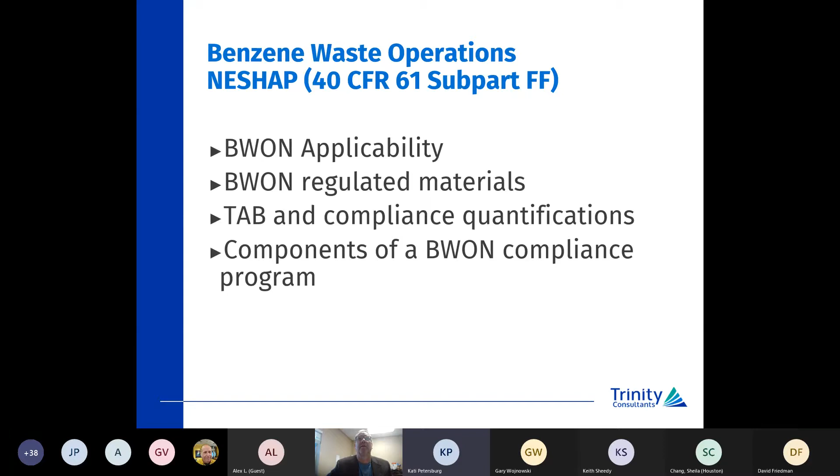All right, so let's get started with the BWON, or the Benzene Waste Operations NESHAP, which, as we now know, ethylene plants are required to comply with. So the BWON requirements are codified in 40 CFR Part 61 Subpart FF. The main topics that we are going to be addressing today are who is subject to the BWON, what materials are regulated by the BWON, what is entailed in the TAB and compliance quantifications, and what are the components of a BWON compliance program.

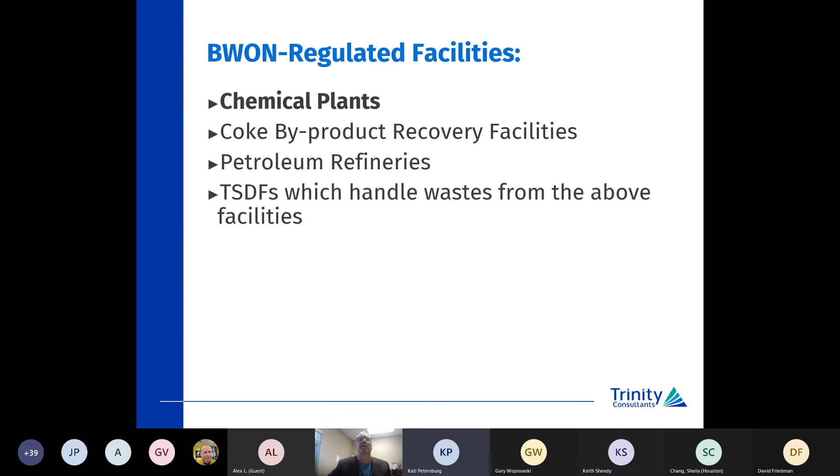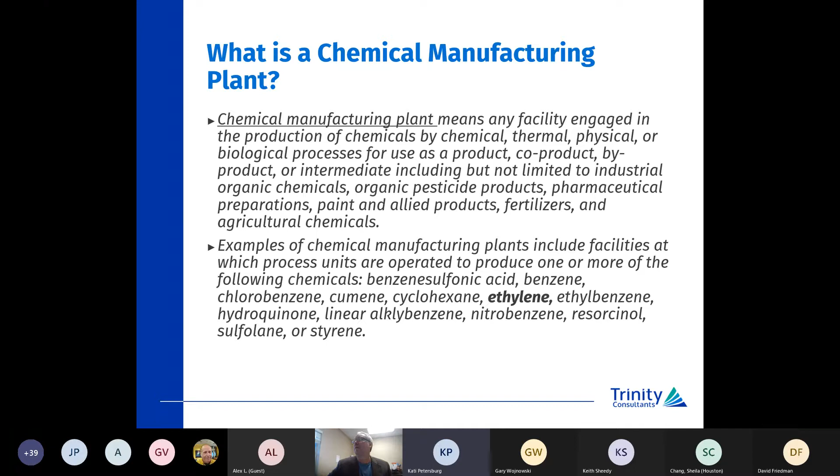So the applicability conditions of the BWON, which are found at 61.340, state that the BWON applies to owners and operators of chemical manufacturing plants, coke byproduct recovery plants, petroleum refineries, and TSDFs that manage waste from those facilities. Now, the majority of you are likely attending this webinar because you're associated with a chemical plant. So what is considered a chemical plant in the BWON? Bear in mind that there are various definitions among the environmental regulations. So I've included the definition of a chemical manufacturing plant from the BWON on this slide. I'm not going to read this, but I do want to point out that the BWON specifically identifies ethylene manufacturing facilities in the rule.

However, there are other considerations to make if you are a chemical manufacturing plant. So if you are a facility who is identified as a chemical process plant, which is one of the 28 source categories named in the NSR definition of a major stationary source, then you are likely subject to the BWON. If you are a facility that is subject to one of the many MACT standards that contain overlap provisions with the BWON, including the EMACT, then you are subject to the BWON.

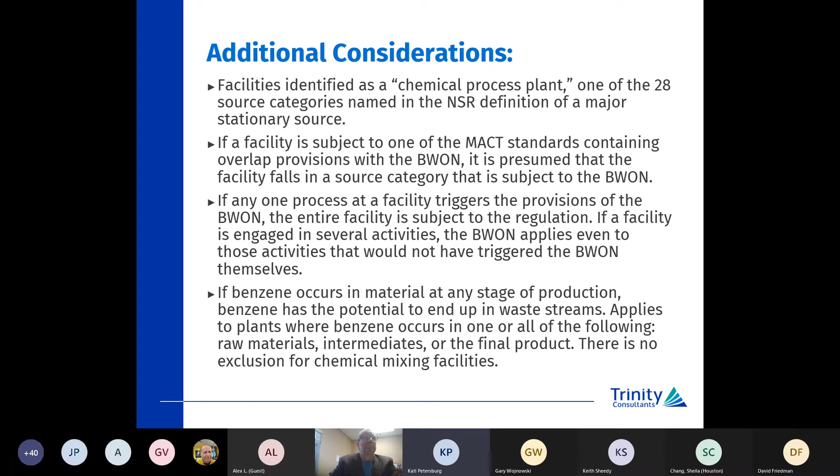If any one process at your facility triggers the provisions of the BWON, then your entire facility is subject to the BWON. So if you have multiple activities at your facility, the BWON applies to all of those activities, not only those that triggered the BWON. And if benzene occurs at any stage of production at your facility, whether this is raw materials, processing, mixing, final product, and there is the potential for benzene to end up in your waste streams, you are subject to the BWON.

Another thing I'd like to point out is that while the BWON is found in the air regulations, it is more easily understood as a wastewater regulation. At no point in the BWON compliance would you determine what your actual emissions are. Rather, you focus on the potential of the amount of benzene that could theoretically volatilize.

Now, the BWON's fundamental stipulation is for benzene-containing waste to be managed in controlled systems until that waste is either treated to remove the benzene or returned to the process. And if vapors are generated from control equipment, those vapors must also be managed in controlled systems until treated or directed to a fuel gas system.

So air quality regulations typically require affected sites to quantify their potential pollutant emissions in order to establish which sites are major and which are not. And then only the major emission sources are required to implement control provisions. In the case of the BWON, only those sites with large amounts of benzene-containing wastes must control and treat their wastes and associated vapors.

Now, the trigger for the control provisions is found in the waste characterization called the TAB, or total annual benzene. And that's the sum of the benzene loading in aqueous BWON-regulated waste materials at their point of generation, or point of waste generation, or POG. Now, aqueous in the BWON means that a material is greater than 10% water at either its point of generation or at any time during its management as a BWON waste.

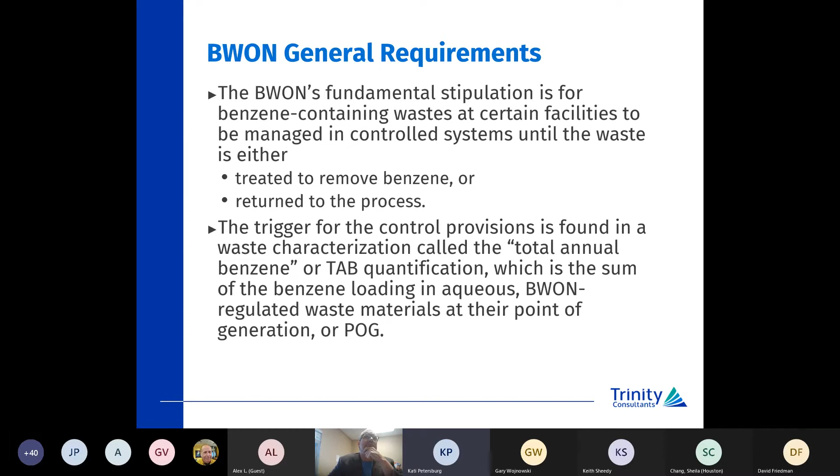So what are BWON regulated materials? Well, the definition of waste in the BWON is a bit more far-reaching than what you find in other regulations like RCRA or the HON. I've highlighted the significant parts of the definition here, and I'll go ahead and read that. So waste is any material that is discarded or is being accumulated, stored, or treated prior to being discarded, recycled, or discharged. So what that means is that waste materials under the BWON, even if they're recycled or sent back to the process, are still subject to this rule.

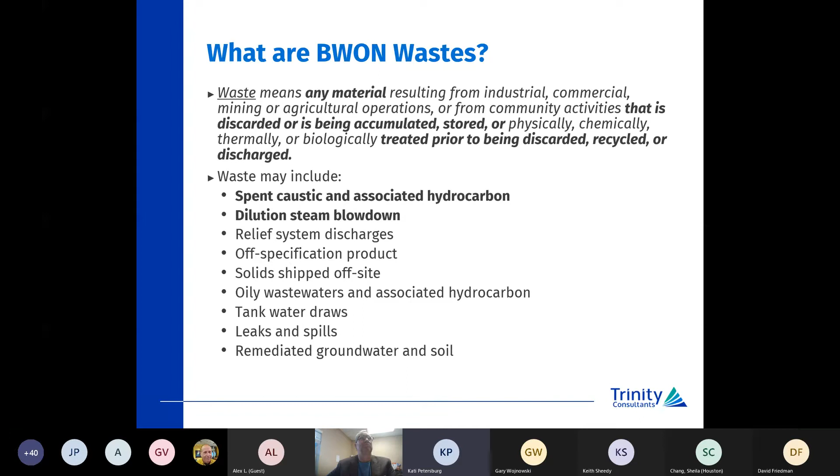On this slide, there are a number of examples of waste materials. In bold are the two that are specifically identified in the EMACT: spent caustic, and that would include the associated hydrocarbon, which we're going to talk about a little bit on the next slide, and dilution steam blowdown.

Okay, so a point of waste generation or point of generation in the BWON. The definition of this varies from a point of determination, or POD, as defined in other MACT wastewater regulations. In the BWON, the point of generation is often upstream of where you would identify the POD, let's say under the HON.

Now, this is kind of a significant theme with the BWON. Both phases of every point of generation must be accounted for in the TAB quantification. This is important when you consider that if the organic phase of a stream is just 1% of the total throughput or flow, but the concentration is 100 times what you find in the water phase, that's going to double the benzene loading in that particular waste stream.

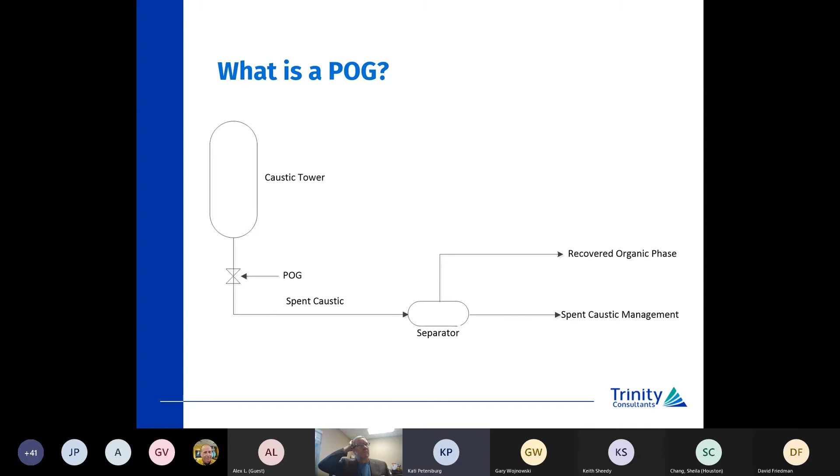So we've talked about the TAB quantification, which is the trigger for the control provisions in the BWON. And the TAB is the sum, like I said before, of the benzene loading in aqueous BWON wastes, both the uncontrolled and the controlled. We will talk briefly a little bit later about how to determine your TAB quantification. But the thing right now to know is that if your TAB is greater than 10 megagrams per year benzene, then your site is subject to the control provisions.

If the TAB quantification is less than 10 megagrams per year, then your site does not need to implement the control provisions under just the BWON, though the TAB quantification must be redetermined each year. And then with a TAB less than 1, you submit only the initial TAB.

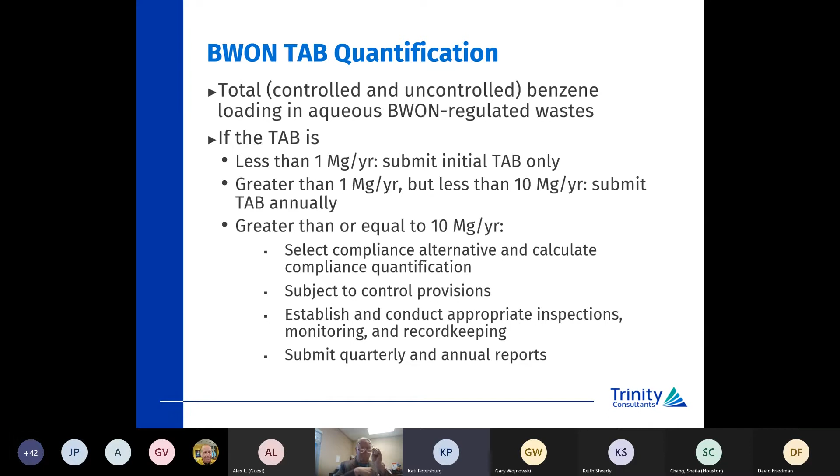So for facilities that trigger the control provisions, because their TAB's greater than 10 megs, the BWON recognizes, because of reality, practical situations, that not all benzene containing waste can be controlled. So the regulation allows for certain benzene containing waste to be managed in uncontrolled systems. And there are 3 compliance alternatives that are spelled out in the BWON, and they allow for different amounts and types of waste to be controlled.

So the 6BQ, I'll talk about what each of those are. The 6BQ compliance option, where BQ stands for benzene quantity. This is EPA's preferred method or alternative. The 6BQ places a total allowable benzene threshold ceiling of 6 megagrams per year on all your uncontrolled aqueous wastes, regardless of their benzene concentration. So this alternative allows the site to choose which streams to control, which to leave uncontrolled, and how much they're going to treat the ones they've controlled.

Under the 2 meg, this is sometimes referred to as the segregate and treat option. Facilities need to control and treat the waste streams whose concentration at the point of generation is greater than 10 ppm, except for any number of streams that the facility selects whose benzene concentration is greater than 10, but their benzene loading contributes to a 2 meg per year ceiling or threshold. So the streams that are controlled must be treated so that their effluent concentration is less than 10.

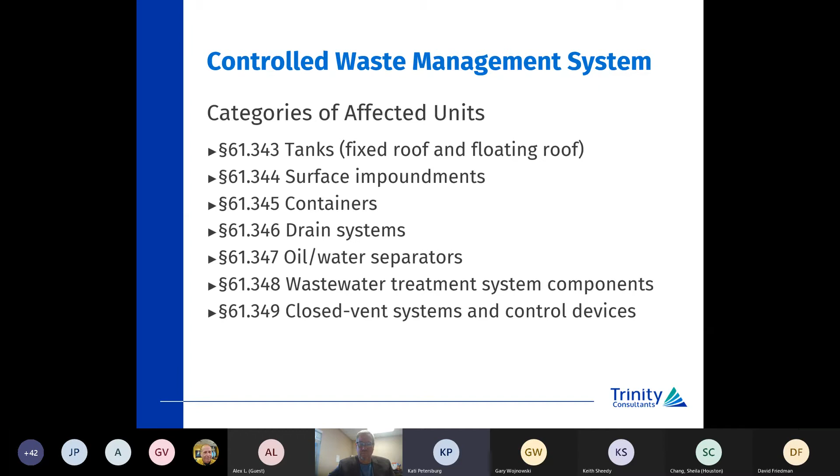Let's see, confirming sealed status typically involves monitoring for leaks initially and annually. That's Method 21. And then visually inspecting for leaks initially and quarterly. There are some caveats here with alternate standards for tanks, but we're not going to get into those. For control devices, combustion-related control devices, you need to continuously monitor an operating parameter, while carbon-related control devices, you periodically monitor the effluent vapor.

Okay, so BWON reporting requirements. For facilities with a TAB greater than 10, under the BWON, by the date of initial startup, every facility has to submit an initial certification. This initial certification says that the equipment necessary to comply with the BWON has been installed and that the required initial inspections and tests have been carried out.

An annual report, which is typically submitted on April 7th for the previous calendar year, that's also required by the BWON. In addition to the TAB quantification that we talked about, for facilities whose TAB is greater than 10, there's also a compliance demonstration in which you quantify the benzene loading in only your uncontrolled waste, and you put that towards an allowable ceiling. So that's either going to be the 6 or the 2 or the 1.

For both the TAB and the compliance quantification, there is a general requirement for a table where you list all the waste streams or the points of generation, say whether it's aqueous or non-aqueous, and whether or not it's controlled. In this table, you also include point of generation characterization data, like your annual waste quantity and range and annual flow weighted concentration data, so that you can get an annual benzene quantity for each waste stream. And then you sum each waste's benzene quantity. So to obtain a facility-wide TAB quantification, you would sum all of the uncontrolled and controlled waste to get the TAB. And then for the compliance quantification, you would sum just your uncontrolled wastes.

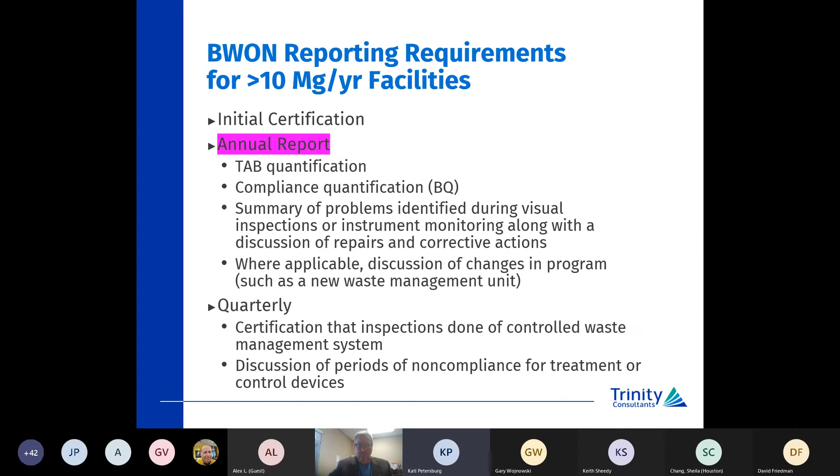However, issues that are related to treatment devices and control devices, those are included in the quarterly report. And again, you would include a description of the problem and what the corrective actions were. Okay, that kind of sums up the BWON requirements. So let's move on to the EMACT.

The EMACT, or ethylene MACT, which is intended to control organic HAPs from ethylene plants or propylene plants. This was promulgated in 2000 along with several other MACT rules as part of the generic MACT or subpart YY. Along with YY, subpart XX was simultaneously promulgated, and this is where you will find the requirements for ethylene process wastes and heat exchange systems. We're going to be focusing on process wastes.

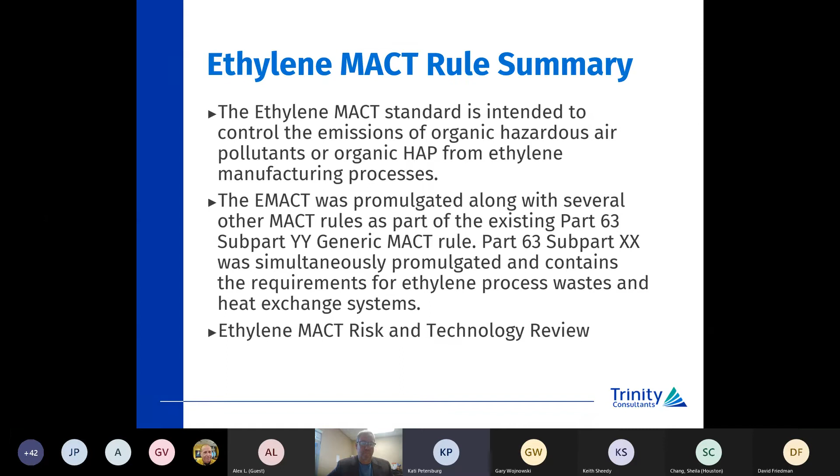Okay, so the ethylene MACT RTR, or the Risk and Technology Review, the final rule for that was proposed in October of 2019, and then published on July 6th of last year. So you'll see the compliance date for that is either initial startup of a facility or 3 years after publication of the RTR, which would mean that those changes go into effect in July of 2023.

The RTR includes updates to the EMACT standard, although today I'm only going to be discussing the changes to the EMACT that apply to the BWON overlap. So as I mentioned before, the EMACT is intended to control the emissions of organic HAPs from ethylene and propylene plants. Now, one thing to note is that these facilities, any process and equipment that are subject to either MACT CC or the HON, they're exempt from the EMACT, except as provided for in the wastewater overlap provisions.

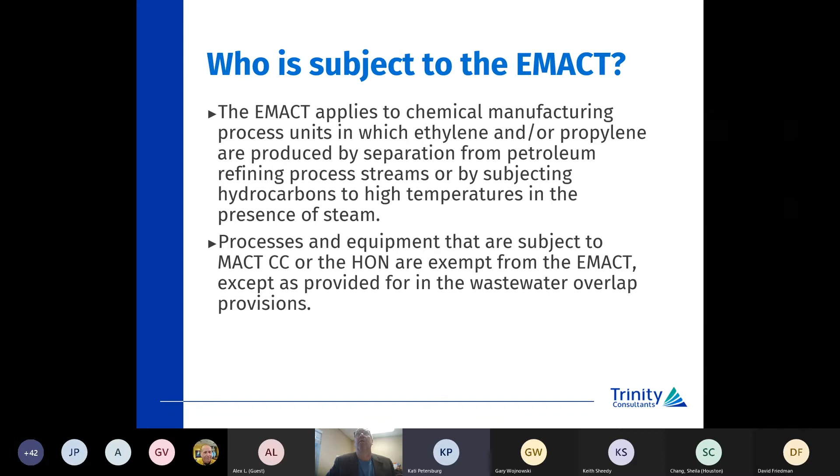The EMACT regulates emissions from a number of organic HAPs. Those include benzene and 1,3-butadiene, which are the two constituents that I'm going to focus on today, as they are the constituents that the overlap provisions are concerned with. The EMACT contains several overlap provisions, and I've listed them here. And they, of course, include the benzene waste operations NESHAP. I'm not going to go through what those are.

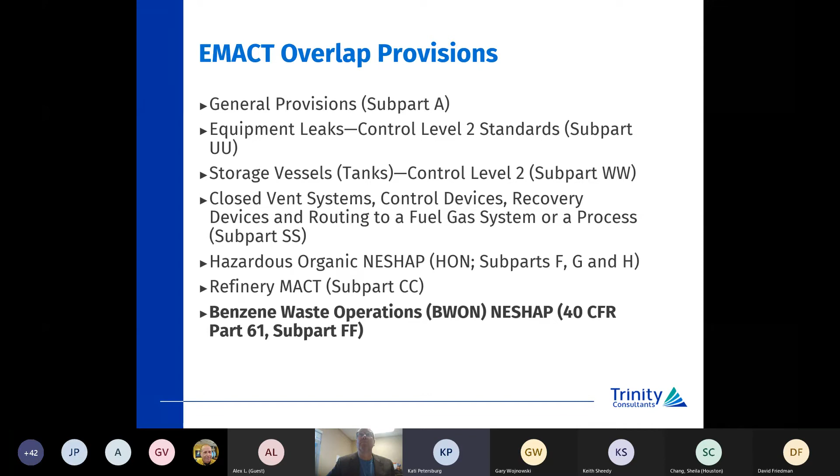However, collectively, subparts YY and XX, along with those overlap provisions listed on the previous slide, they aim to control emissions from these 6 source categories. So heat exchange systems, waste operations, storage vessels, process vents, transfer racks, and equipment leaks. Now, only the waste operations provisions address the BWON.

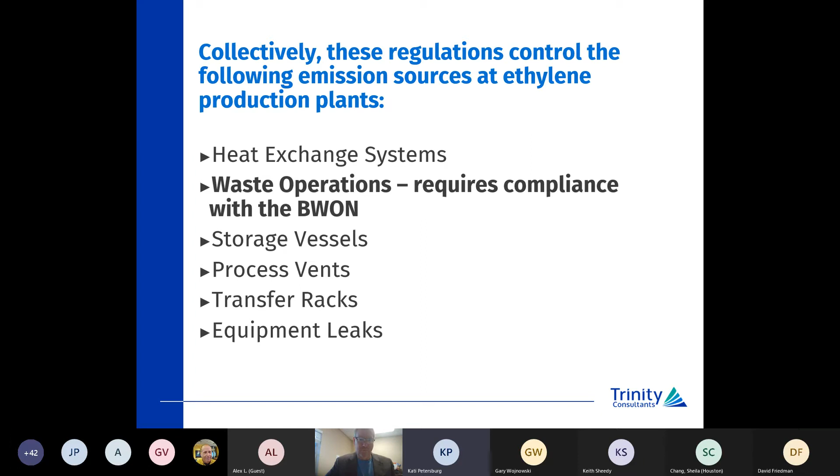Okay, so now we get to the overlap provisions. Subpart XX requires compliance with the BWON. So if you're subject to the EMACT, you're subject to the BWON. No questions there. Ethylene facilities that have a TAB that's less than 10 and would therefore be exempt from the control provisions of the BWON normally under subpart FF, those are not exempt from the requirements of the EMACT. I'm just going to point out it's very rare for an ethylene plant to have a TAB less than 10, but we're going to talk about all of the parts of the rule in here, but just keep that in mind.

Subpart XX also includes additional requirements to control certain butadiene containing waste streams, and we're going to get into what those are in a little bit, as well as modified requirements for both wastes shipped off-site and for flares. And there are some reporting and notification requirements in the EMACT that supersede those that are in the BWON. So the EMACT specifically discusses benzene containing and butadiene containing wastewater streams. Let's talk about the benzene containing wastewater streams first.

So under the EMACT, spent caustic and dilution steam blowdown must be controlled and treated per the BWON, regardless of a facility's TAB. There is a process wastewater exemption. So if you have streams that are less than 0.005 GPM or less than 10 megagrams per year total waste quantity, those are exempt from the control provisions.

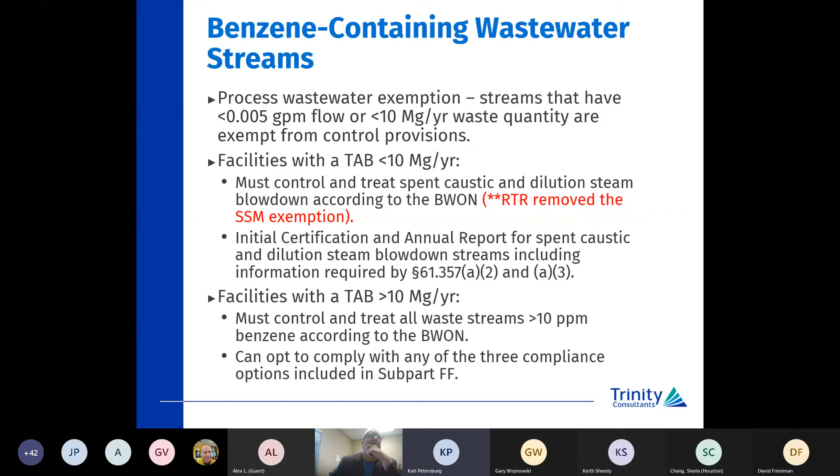Okay, let's talk about butadiene containing waste streams, which in the EMACT focus on continuous butadiene wastewater streams. So what are those? Those are wastewater streams that contain greater than 10 ppm butadiene, and they meet the definition of a continuous butadiene waste stream. I'm going to go ahead and read what that is, but basically there's 4 streams that are listed in the definition in the EMACT.

So a continuous butadiene waste stream is continuously flowing process wastewater from the aqueous drain from the debutanizer reflux drum, water separators on the C4 crude butadiene transfer piping, and the C4 butadiene storage equipment, and then spent wash water from the C4 crude butadiene carbonyl wash system. Continuous butadiene waste streams are waste streams that are not covered by another NESHAP, which would include streams that have greater than 10 ppm benzene, because those are covered by the BWON.

Okay, so continuous butadiene wastewater streams that contain greater than 10 ppm butadiene, those have to be controlled and treated per the BWON or the HON. Now, I'm not going to talk about the HON in this webinar, but if you have questions about the overlap provisions with the HON, you can email me and we can talk about it after this webinar. So they have to be controlled per the BWON or the HON regardless of a facility's TAB, except during periods of SSM. So again, the RTR has removed that exemption. So in 2023, the SSM exemption goes away.

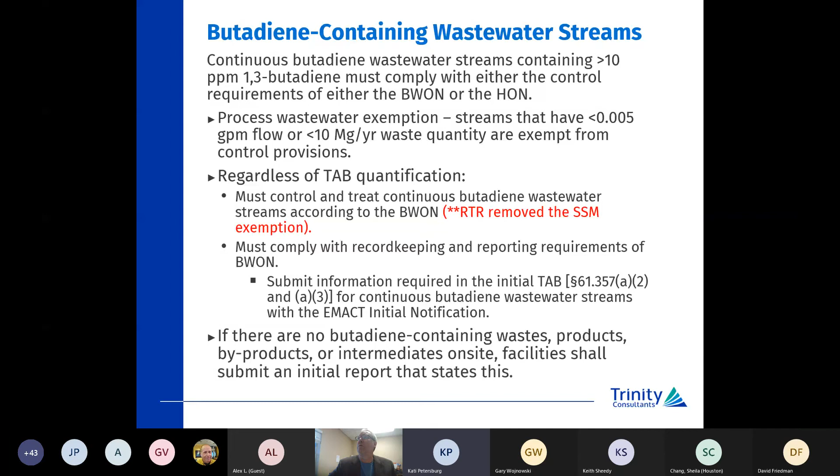Okay, waste shipped off-site and flares. So for waste that is shipped off-site with greater than 10 ppm benzene or butadiene, for ethylene plants, or if you're subject to the EMACT, you need to follow the requirements of the EMACT rather than the BWON. You can find those requirements at subpart XX, 63.1096. But basically it says that a notice must be sent with the waste shipment stating that the waste contains organic HAP and it needs to be treated in accordance with subpart XX. And then the receiver of that waste needs to submit a written certification to the administrator that it will treat the waste according to subpart XX.

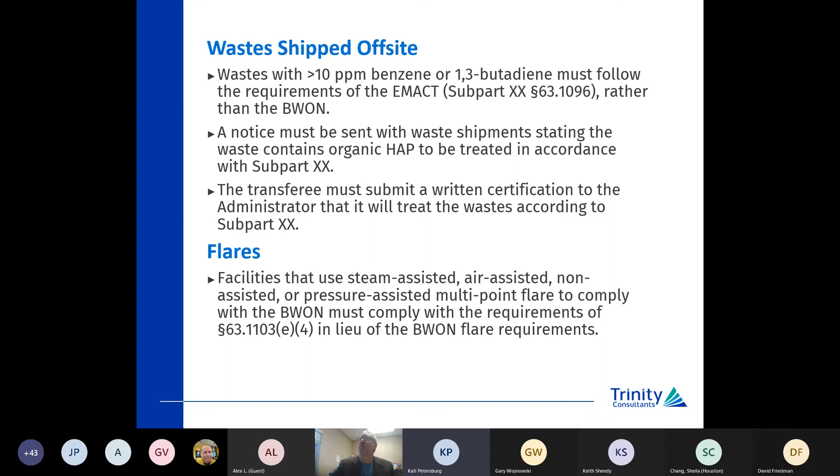Regarding flares, facilities that are subject to the EMACT, if you use a steam-assisted, air-assisted, non-assisted, or pressure-assisted multi-point flare to comply with the BWON, then you need to comply with the requirements of 63.1103(e)(4) rather than the BWON flare requirements.

All right. So there are changes to the reporting and notification requirements, and this is where things can get a little hairy. Okay, those can be found in Table 2 of Subpart XX. Now, we're going to be talking about the requirements for a lot of different reports. There's the initial certification, initial notification, initial and annual TAB, compliance quantification, notice of compliance status. You may already know that the BWON requires most things to be done, certified, and submitted relatively early in the operation of a new plant at startup, right? Whereas the EMACT requires these submittals months after startup.

So let's go through what those are, what the changes are. If you're a facility that has a TAB that's less than 10, you need to submit the initial TAB report that's required by the BWON as part of the initial notification required by the EMACT. And with that initial TAB, you need to include continuous butadiene waste streams.

Additionally, and this is new for facilities with a TAB less than 10, new with the EMACT overlap provisions, you need to submit an initial certification that the initial inspections and monitoring have been done for controlled waste management systems that handle spent caustic, dilution steam blowdown, and continuous butadiene waste streams. You're going to submit that initial certification as part of the NOCS, or Notice of Compliance Status, that's required by the EMACT.

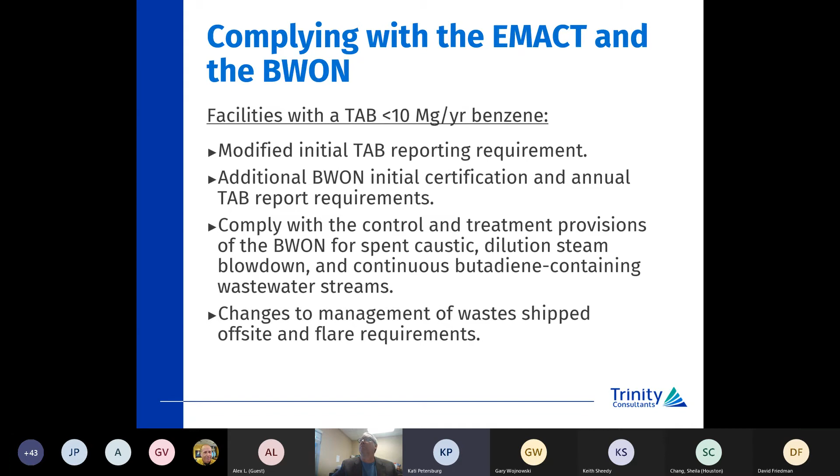So if they're expecting that report to come on the anniversary of the NOCS, then I would include a copy of it. But again, this is something that should be talked about with your regulator, when they would be expecting that report. And then you need to follow the EMACT requirements for waste shipped off-site that we discussed, and also the change for the flare requirement.

Okay, so this is probably going to be most of you, and that's facilities with a TAB greater than 10. Now, there's not a whole lot that changes for a facility with a TAB greater than 10, other than you would also capture the continuous butadiene waste streams in your controlled waste management system, and you include information about those in your TAB report. However, the notification and reporting requirements are also different, just like they are with facilities less than 10.

So again, you would submit the initial TAB report that's required by the BWON as part of the initial notification. The initial notification comes after the initial TAB is due by the BWON. So just like facilities with a TAB less than 10, we recommend submitting it when it's due for the BWON and including a copy of it as an attachment to your initial notification.

You would submit your initial certification that you would normally do with the BWON, but remember to include continuous butadiene waste streams as part of your controlled waste management system. You'd submit that initial certification and the information required in your annual TAB report as part of the NOCS under EMACT. And then of course with the TAB report also include continuous butadiene waste streams.

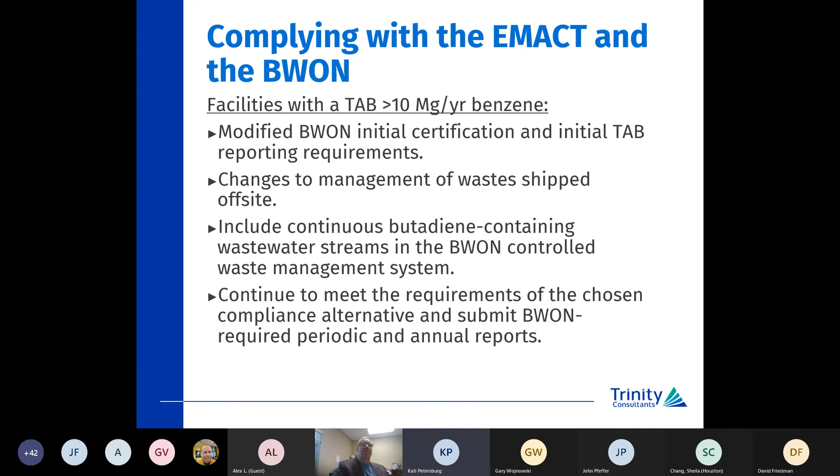Also remember the quarterly reports are still due per the BWON regulation. So those semi-annual or periodic reports required under the EMACT do not do away with the quarterly reports. And again, we have the new waste shipped off-site and flare requirements. All right, that's it. That covers the overlap provisions of the BWON and the EMACT.

So I don't know, Steve, if you had any questions that came up. There was a question. Would you explain why EPA prefers 6BQ? So the reason I say EPA prefers 6BQ is because that's usually the compliance alternative that's going to show up in a consent decree.

Now, the consent decrees haven't necessarily hit all the chemical plants like they have the petroleum refining industry. But if you see a consent decree from the petroleum refining industry, those consent decrees are going to say, if you're not already in a compliance alternative, you're going to choose the 6BQ.

Why they like that approach, I think it's probably because it's the easiest one to validate. So with the 2 Mg, which is the other one that a lot of facilities employ, there is a requirement to demonstrate that the streams that are not being controlled are less than 10 ppm. A lot of facilities don't do that. So there's, I think, a lacking of documentation there.